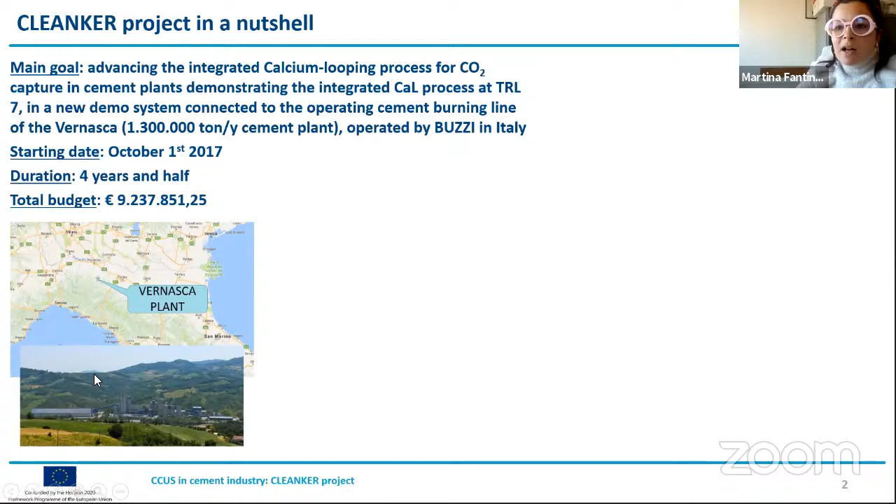So this is the Buzzi Unicem cement plant where our demonstrator has been erected in the last months. We are 13 partners, 5 from EU member states, plus Switzerland and China.

And the partners have complementary skills both on modeling and on experimental activities in order to reach the main goal that we have. You can also see that this is a capture project, but we have a lot of work packages also devoted to other activities.

Indeed, at least in 2017, this was the first time for a European project focused on capture that included the full CCUS value chain study. In particular, there is a work package totally devoted to this activity.

And the tasks include the techno-economic modeling of CO2 transport, storage, and utilization scenarios, the CCUS regulatory issues in order to understand the gaps in national regulation, the definition of Buzzi and Italcementi cement plants, these two cement users, because they are partners in Cleanker.

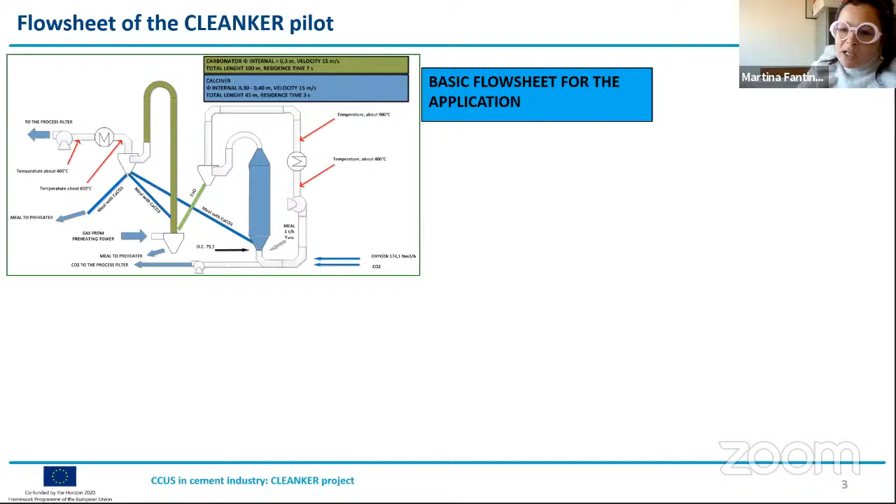I always like to start with this sketch because in 2017, Cleanker in our project proposal was just this drawing. And after the first year and a half, after the effort of the partners devoted to the engineering of the demo system, the flow sheet became a bit more complicated.

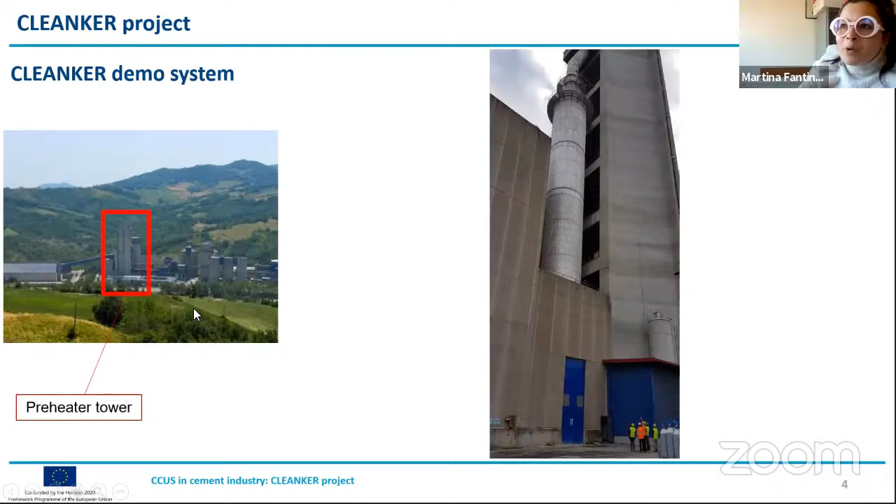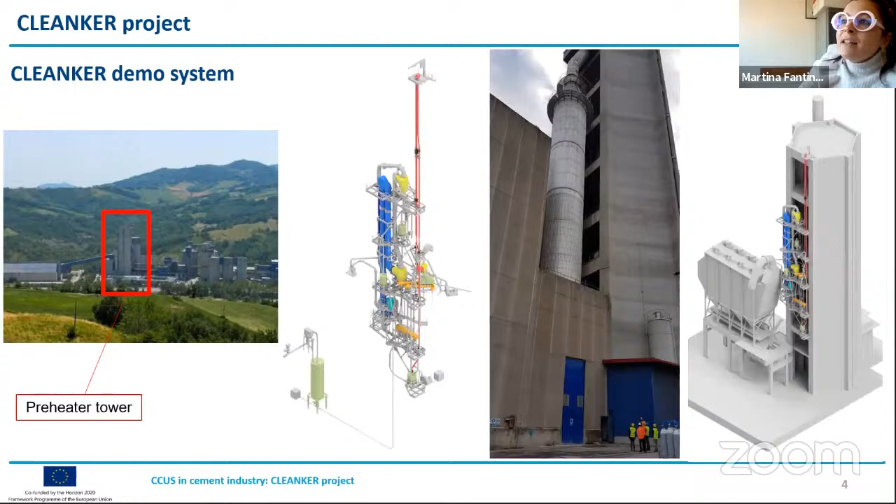After more than 3 years, we have done a lot of work in the characterization of the raw meal at lab scale, engineering, construction, modeling, etc. And we have completed the erection work last autumn. In particular, here you can see a view of the cement plant.

The calcium looping technology basically is the loop of calcium between two reactors named carbonator and calciner. Here in the picture on the right, you can see the view of the carbonator, and here on the left, you can see the calciner and the integration in the preheating tower.

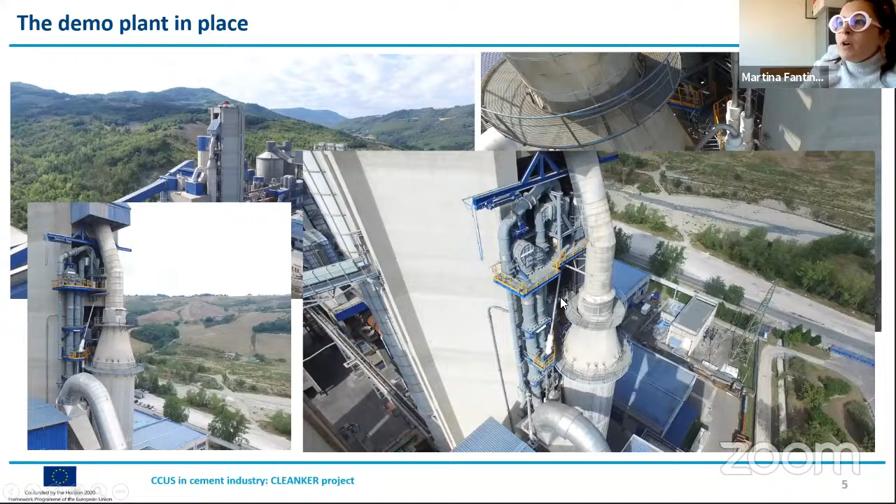In autumn 2020, we had also the opening event, which, of course with the restrictions due to the situation, included the cutting of the ribbon.

So the commissioning is completed, and from the point of view of testing, we are ready to start the experimental campaigns.

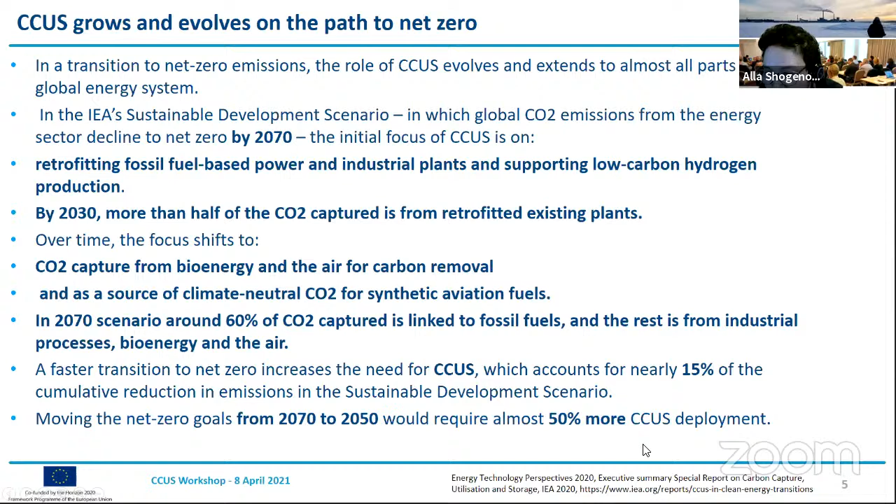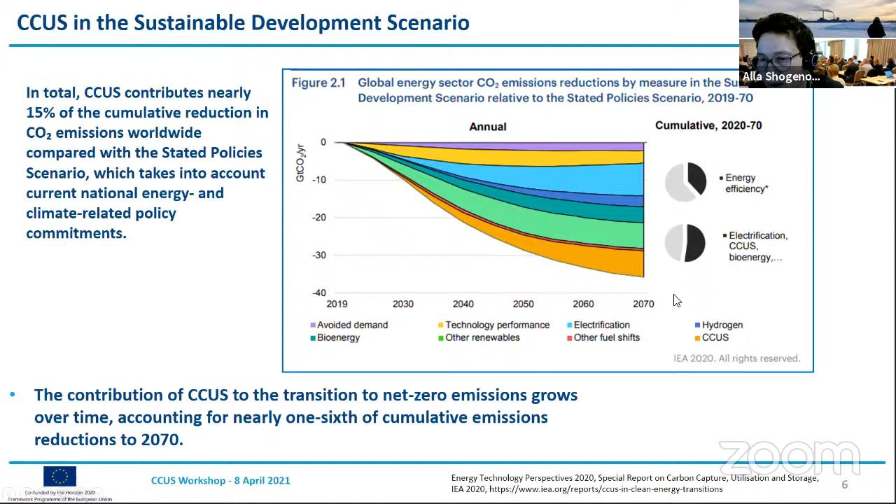Also, carbon removal plays an important role in net zero transitions. Technology-based carbon removal is needed to balance emissions that are technically difficult or expensive to eliminate.

When net zero emission is reached in SDS, still about 3 gigatons of emission remains, notably from transport and industry sectors. These emissions could be captured from bioenergy and the air and stored underground. Direct air capture technologies have significant potential to accelerate the transition to net zero, but we need to decrease costs. So capturing directly from the air and storing is an alternative to capturing it from bioenergy.

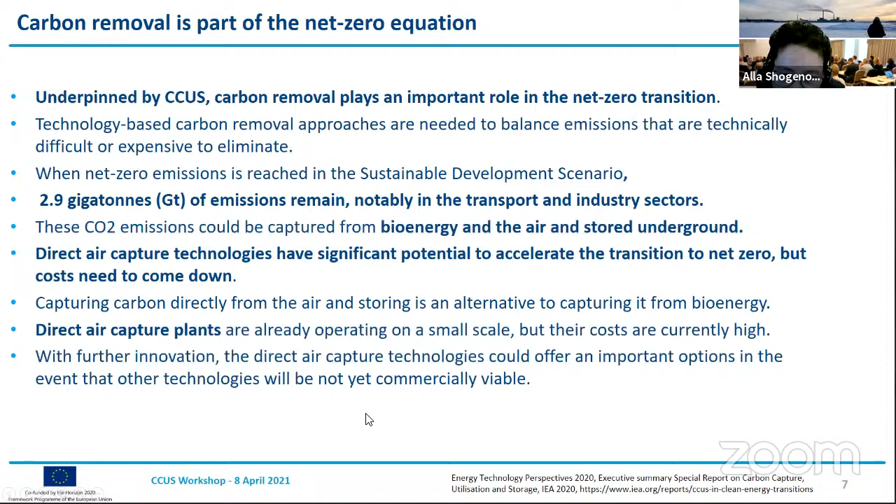Direct air capture plants are already operating in small scale, in pilot scale. Costs are currently high, but with further innovation, it will be a very important option, especially if other technologies are not yet commercially available.

So you can see how CO2 emissions will be captured with CCS in the sustainable development scenario. Now in 2020, total CO2 emissions in the world are more than 33 gigatons. In 2030, after applying CCS and all measures, we will still have 27 gigatons. In 2050, we will not come to zero—we will still have 9.4 gigatons. According to this scenario, net zero, carbon zero society will be possible only in 2070.

What is interesting is that in this scenario, only 10% of CO2 is possible to use in 2050 and 2070—all other CO2 we have to store.

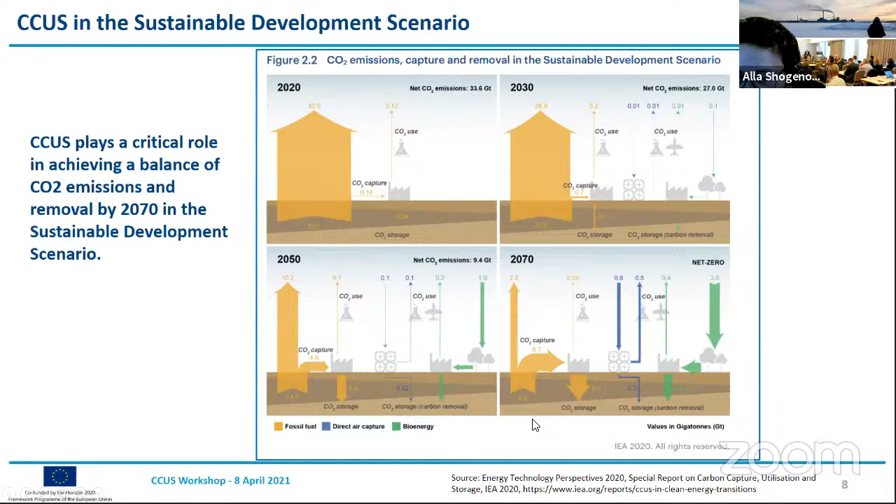Generally, around 60% of CO2 captured up to 2070 is from fossil fuel use. The rest is from industrial processes, bioenergy, and direct air capture. This reflects difficulties to eliminate CO2 emissions in some industry sectors and in the cement sector, and also the growing role of biofuels and direct air capture in producing synthetic aviation fuels and removing CO2 from the atmosphere. So fossil fuel is still the source of about half of CO2 captured in 2070, and around 1/3 of this is from low carbon hydrogen production from natural gas.

So when net zero emissions are reached in 2070 in the sustainable development scenario, 9.5 gigatons is captured and stored, and all the rest is captured and used.

The power sector accounts for around 40% of the captured CO2 in 2070, but half of this is linked to bioenergy, and 1/4 of CO2 captured is in heavy industries. Almost 30% is in fuel transformations to produce hydrogen and ammonia from fossil fuels. CO2 captured from biofuel plants is also used to make synthetic fuels or stored for carbon removal. The next 7% comes from direct air capture.

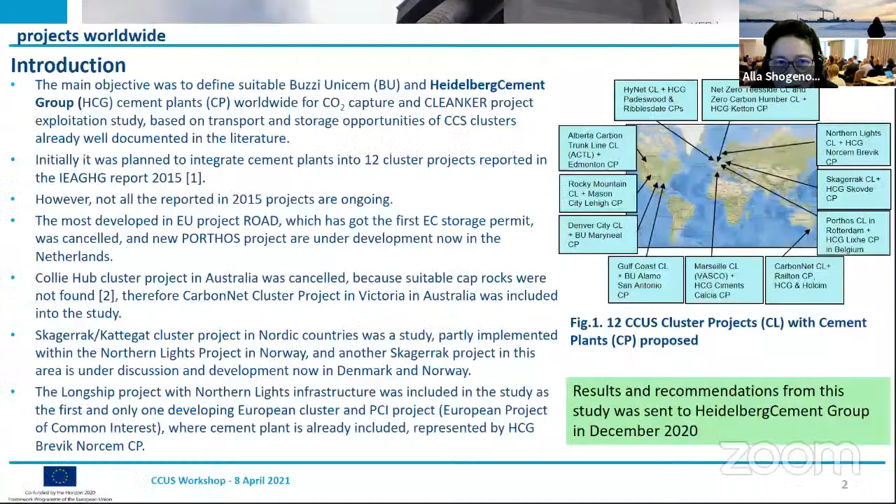Okay, thank you very much, I will try. So generally, this work was made in the Cleanker project as one of the work package 7 tasks. We had to define suitable Buzzi cement and Heidelberg cement plants worldwide for integration in the worldwide CCS cluster projects.

Initially, it was planned to integrate cement plants in 12 cluster projects reported in International Energy Agency Greenhouse Gas Report 2015. From that time, some projects were stopped, new projects started. So finally, we made integration of 12 cement plants into 12 worldwide projects.

Methodology of this work was that we collected data into the database from 12 projects: geological, technical, CO2 emission, transport data, and also we collected data from the Buzzi and Heidelberg cement group cement plants from these countries, and we needed to define the best suitable match.

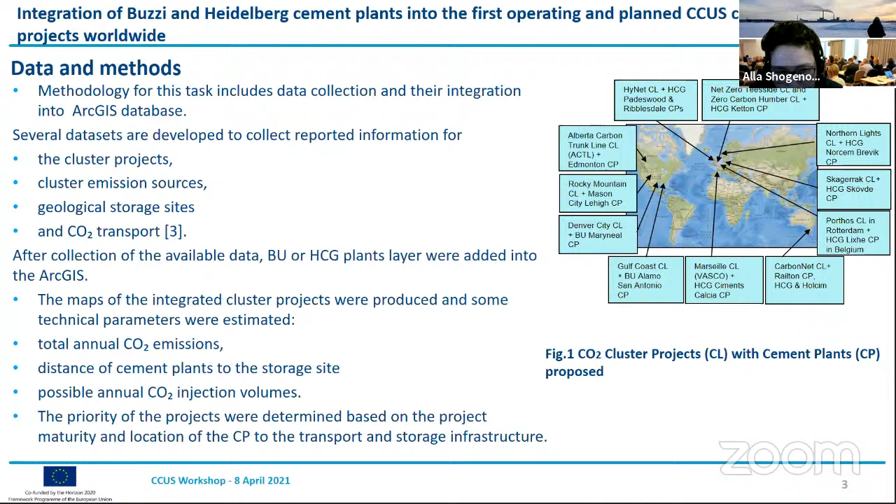I will start with some details for some projects. In North America, we mapped 4 projects, 1 in Canada and 3 in USA. In Canada, the Alberta Carbon Trunk Line project is very interesting because it used CO2 emissions from 2 emission sources, which could be transported along the available large diameter pipeline, 16 inches, with a distance of available CO2 pipelines of 240 kilometers, and the CO2 storage planned in Clive field, Alberta.

This project reported last year that all operations are ready, and storage is planned in the Leduc Formation Nisku Reservoir at a depth of about 2 kilometers. Generally, the annual capacity of the pipeline is about 15 million tons, and they will give access to all producers in the Alberta Industrial Heartland.

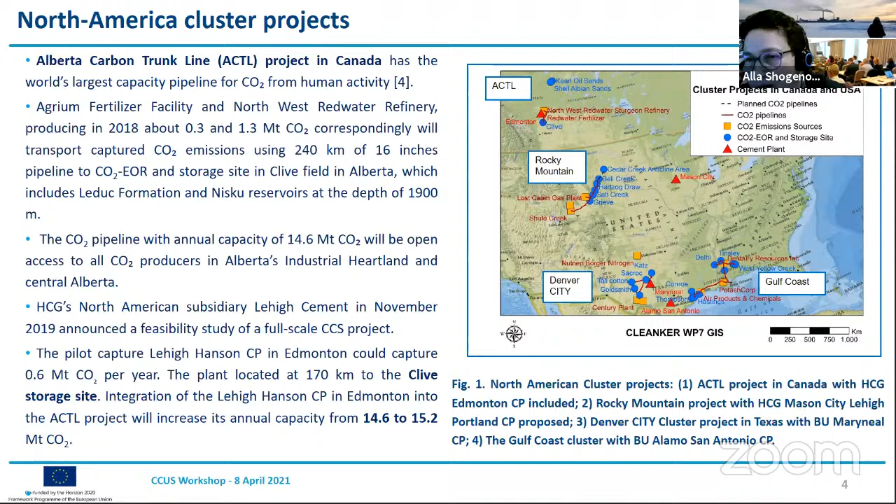There are very good plans for integration of one cement plant. Piloting is already started for the ACTL cluster in Canada.

And in United States, we mapped 3 projects: Rocky Mountain, Denver City project, and Gulf Coast project. We identified the cement plants close to these projects. All these cluster projects in the United States are using CO2 for enhanced oil recovery.

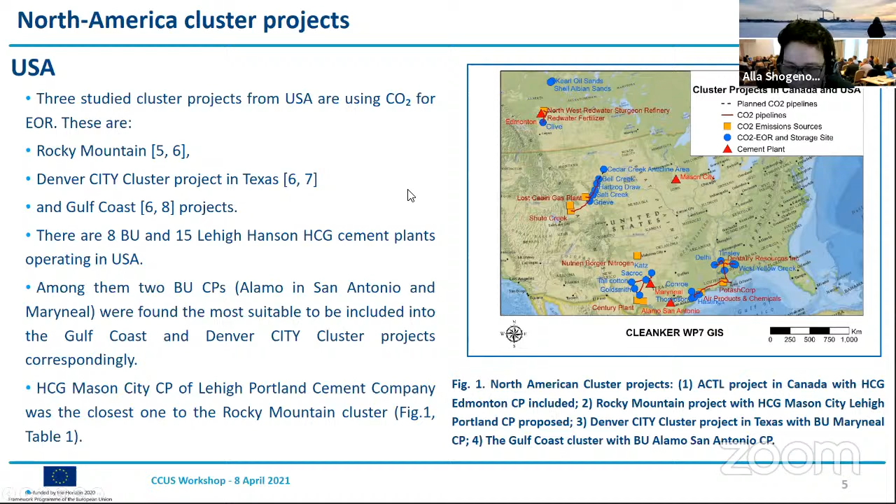I would like to show some more detailed maps. This is the Rocky Mountain cluster, and they have at least 6 operating CO2 enhanced oil recovery fields. They use annually more than 10 million tons of CO2 capture, 2 gas processing plants, and the Mason City Lehigh Hanson cement plant could be integrated, but the location is not very close, about 1,200 kilometers.

So in the Denver City cluster, a large project already uses 45 million tons of natural CO2, with more than 8 million tons captured by 3 plants. You can see these 1, 2, 3 plants. And there are at least 6 depleted oil fields which could be used.

All these projects I'm speaking about in the United States have been operating successfully for many years. For the Denver City cluster, the Maryneal cement plant is located at a good distance, only about 81 kilometers from the Sacroc oil field, and it could be integrated into this cluster.

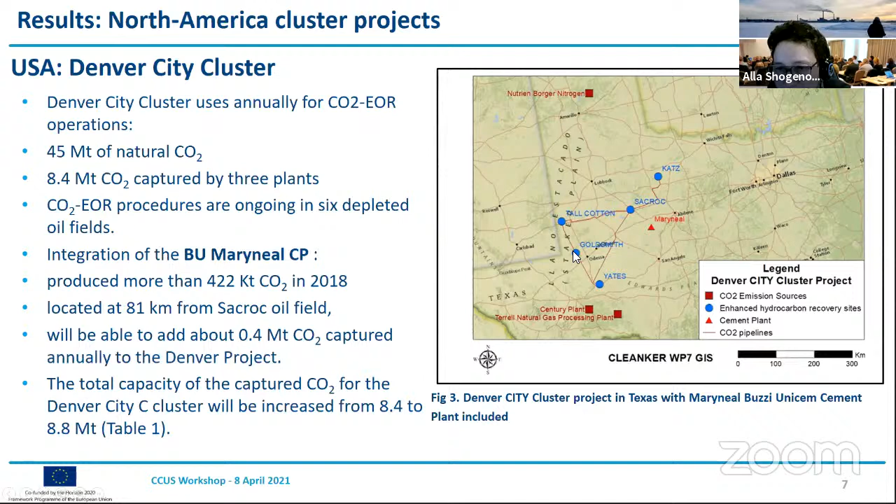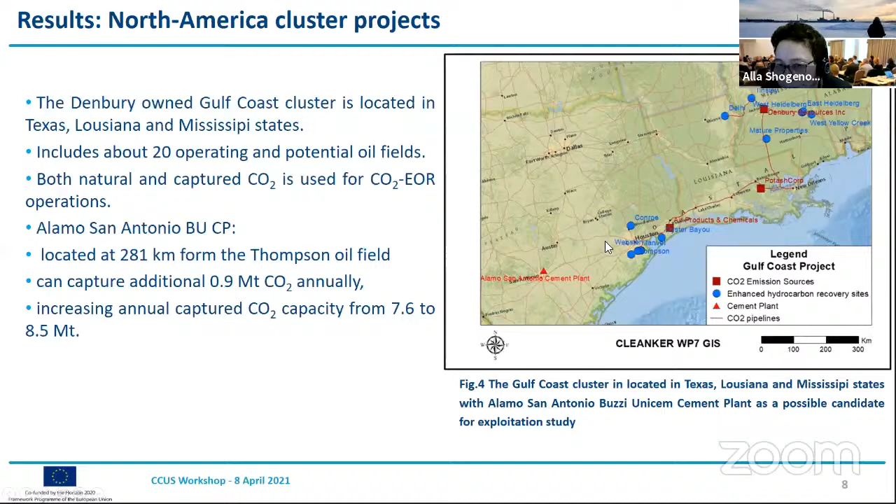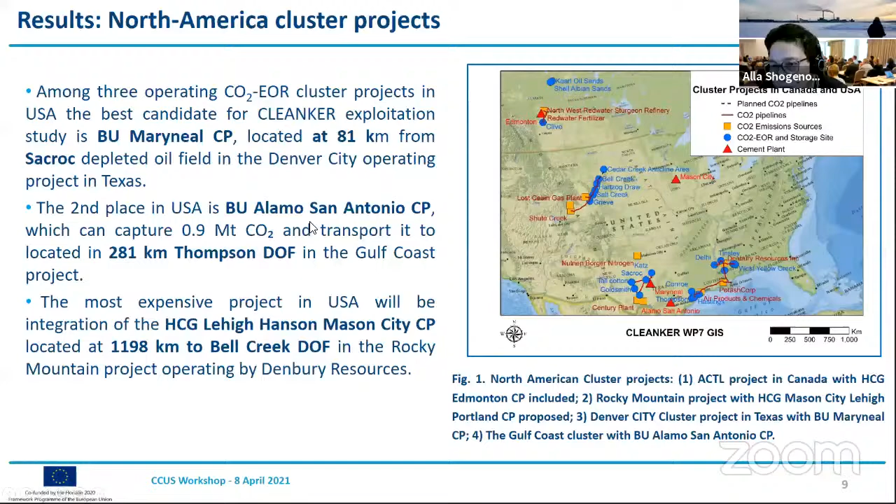The Denbury-owned Gulf Coast project is located in 3 United States states. There are 20 operating and potential oil fields, and the San Antonio cement plant is located at a distance of about 280 kilometers and could be integrated. So generally, the best for United States, we found 3 cement plants for 3 operating cluster projects using CO2 for enhanced oil recovery, and the best location is for the Buzzi Unicem Maryneal plant.

We also mapped one project in Australia. It is the CarbonNet project, which we mapped instead of the Collie project in Australia. The Collie project was cancelled because they did not find suitable cap rocks in the storage site.

But the CarbonNet project is in a good developing phase. They have the Pelican storage site, and they have already drilled an injection well there. This will be offshore storage, and this site, known as Pelican, has good capacity, at least 125 million tons.

They have already 3 injection wells and 1 observation well, and a cement plant is located close by. The closest is the Heidelberg, partly shared by Heidelberg Cement and Holcim Australia Railton plant, but it's located in Tasmania. The distance is about 350 kilometers by ship, plus also 20 kilometers onshore by pipeline.

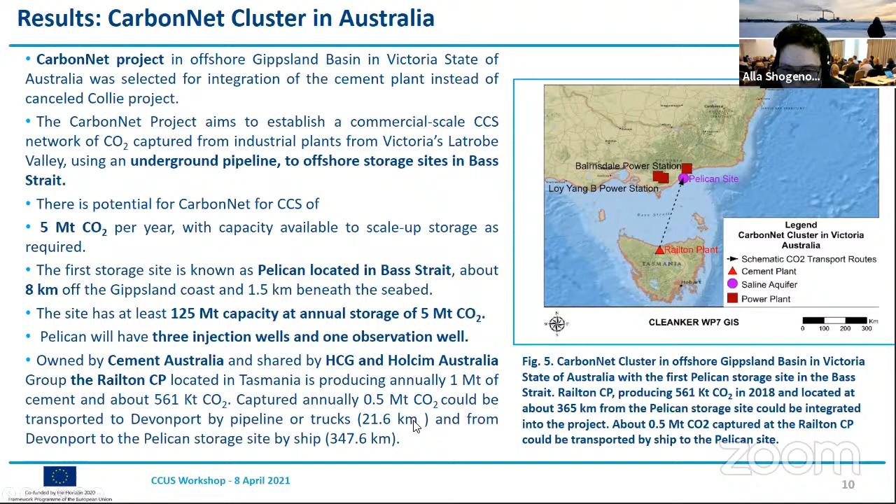If we go to the European project, most people interested in CCS know that the most advanced project in Europe is the Longship project with Northern Lights infrastructure in Norway. This is the only project in the world which already includes the Norcem Brevik cement plant.

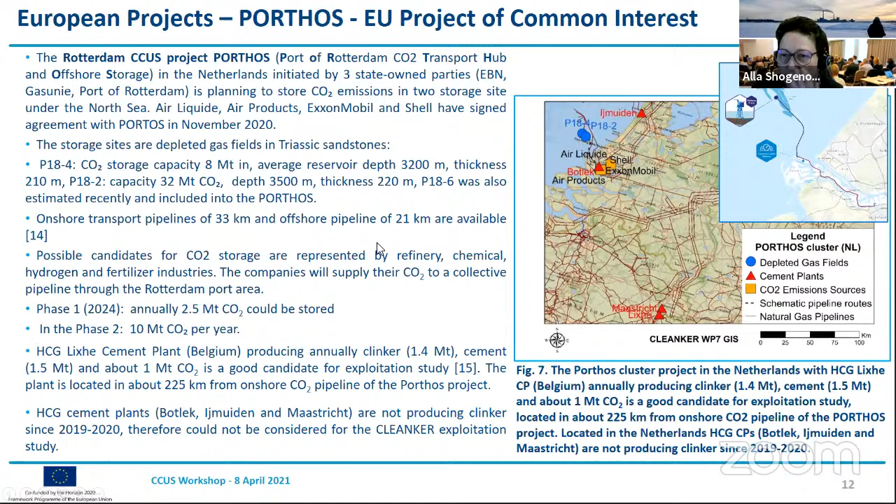We also mapped the Porthos project in the Netherlands, which replaced the Rotterdam project. Now there is no cement plant in the Netherlands which could be integrated, because the 3 available cement plants there are not producing clinker anymore, so the CLEANKER technology could not be applied. But the cement plant Lixhe in Belgium is located very close, only 225 kilometers from the onshore CO2 pipeline of the Porthos project. The Porthos project is planning to make storage in offshore depleted gas fields.

A very interesting country for cluster projects is the United Kingdom. We mapped 3 projects: Net Zero Teesside, Zero Carbon Humber, and HyNet. Net Zero Teesside and Zero Carbon Humber are planning to make storage together in the Endurance offshore saline aquifer storage site. We identified the Heidelberg Cement Ketton cement plant, which could be integrated, with CO2 transported from this plant to the Endurance site.

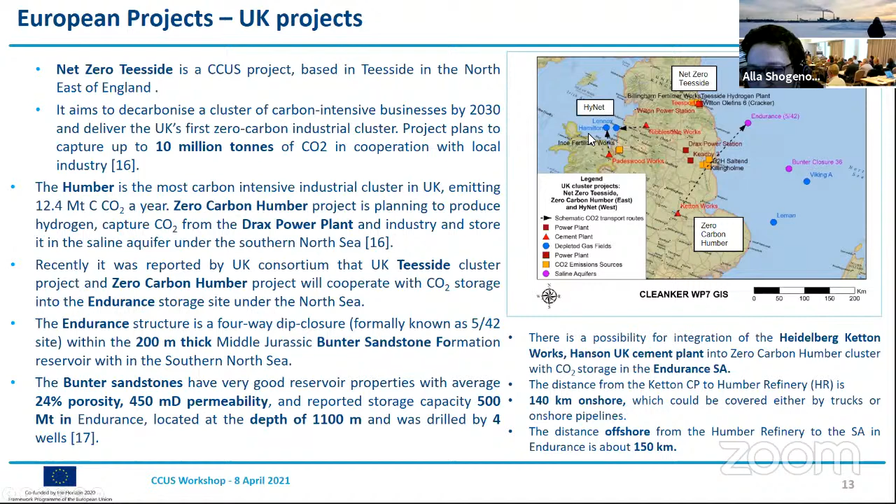But the most exciting proposal was to integrate with the HyNet project, which is planning to produce hydrogen. We proposed integrating 2 cement plants, Padeswood and Ribblesdale, which are located very close, 50 kilometers and 85 kilometers respectively.

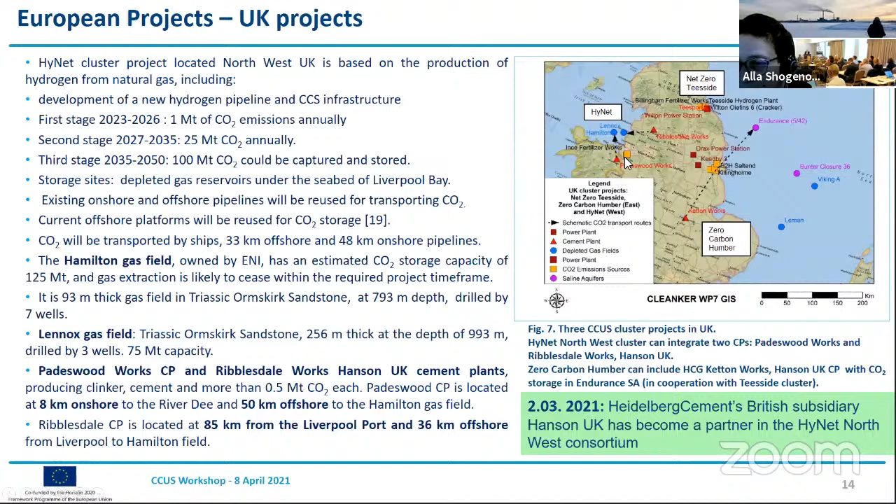We are very glad that we sent our recommendations from this project to Heidelberg Cement group, and they took the decision and already signed an agreement with the HyNet project that the Padeswood cement plant will be integrated and will work together in the HyNet project.

The information from Heidelberg Cement came in the beginning of March that they will make a feasibility study, and the Padeswood cement plant will be the second cement plant in Europe integrated in a CCUS cluster project after Northern Lights, of course.

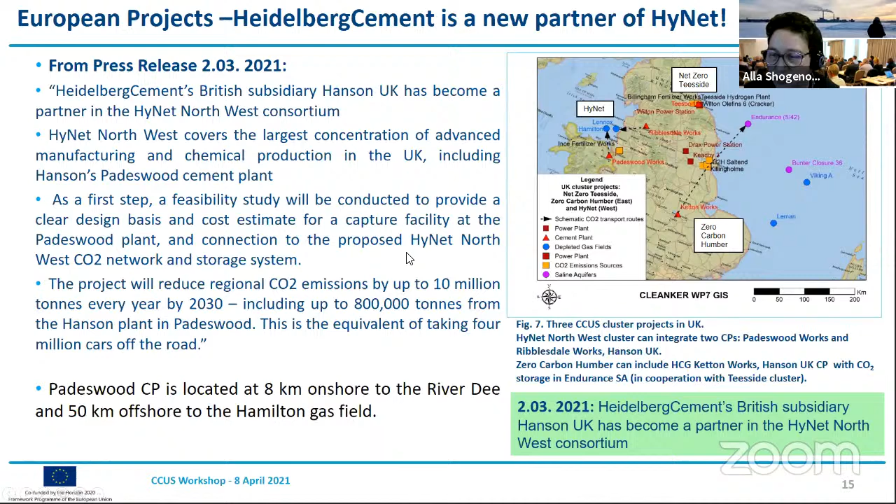In conclusion, we mapped technical and geological parameters of 12 large projects, which were included into the database and integrated with 12 Heidelberg Cement and Buzzi Unicem cement plants prospective for CLEANKER calcium looping technology exploitation. The distance from cement plants and maturity of the project permitted us to propose priorities for possible integration.

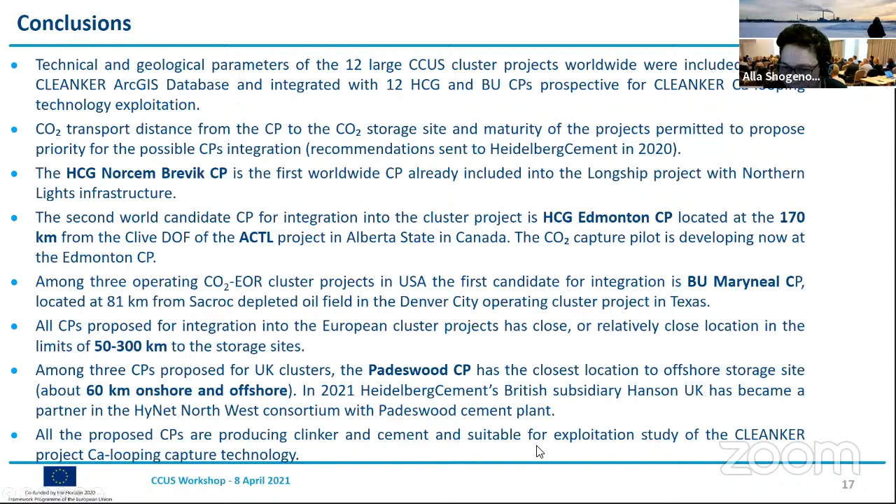We found the most suitable projects in the United States and in Europe. They are located 50 to 300 kilometers from the storage site. The Padeswood cement plant, which has the closest location in the UK clusters in HyNet, has already joined the consortium of the HyNet Northwest cluster project. All the cement plants which we proposed are producing clinker and cement and are suitable for the exploitation study of the CLEANKER project. Thank you very much.

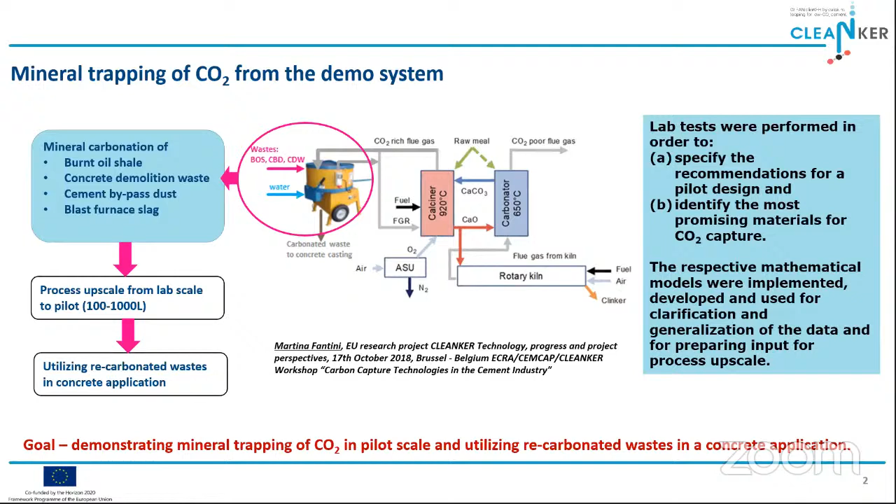As for the waste used, several types of waste were collected from different industrial sectors and characterized for their CO2 binding ability. These include burnt oil shale samples, concrete demolition wastes, cement bypass dust, as well as blast furnace slag from the steel industry.

Burnt oil shale samples were quite promising, but unfortunately the concrete demolition waste samples were not, which I will go into detail later. Here you can see the free lime content, which is the main contributor for mineralization, is non-existent in concrete demolition waste, unlike in the burnt oil shale samples.

So therefore, we also added other samples such as cement bypass dust and blast furnace slag to see the potential. Here you can see the phase composition of the different samples used in the laboratory tests, their CO2 theoretical maximum values, and already existing mineral CO2 inside these samples.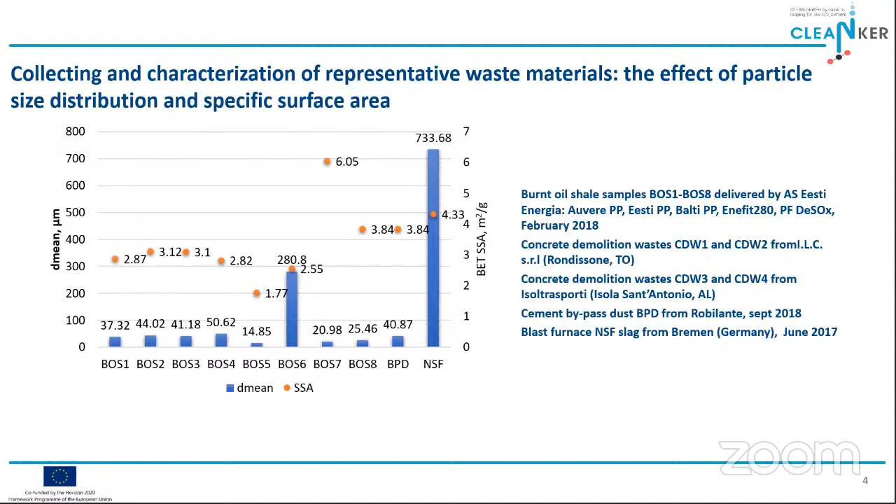As for the scale of the laboratory experiments, they were conducted firstly in a 1 liter intensive mixer using a low water to solid ratio of 0.2. Later, for process upscaling, a 46 liter concrete mixer equipped with gas inlets and outlets was utilized. Operation conditions such as CO2 content in the gas phase, rotational speed, and material flow were varied during the experiments in order to see the parameters' effect on the process.

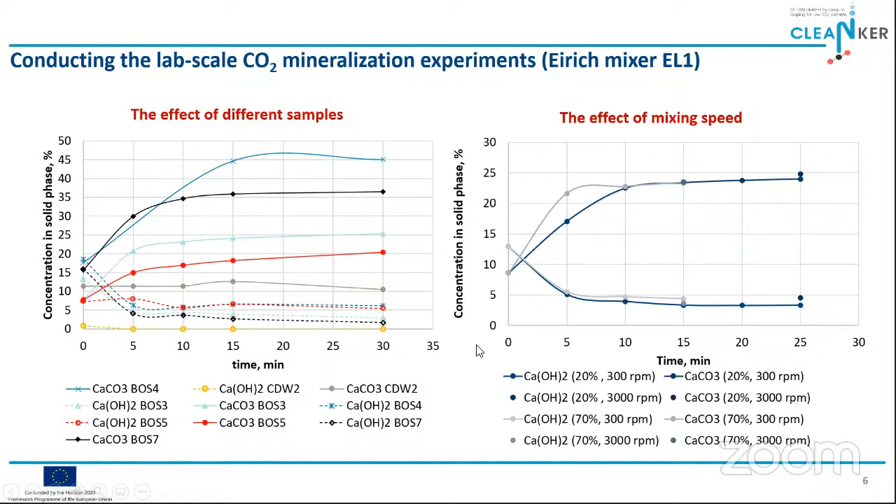The effect of mixing speed as well as concentration were not as visible, meaning they did not really affect the process.

As for changing parameters such as flow rates of both gas concentration and the mass of the samples, they can accelerate the CO2 mineralization process due to improved contact of the phases, up to a point. As you can see here, while the mass increased, the reactor efficiency and carbonation degree increased up to a point, as well as when the gas flow increased.

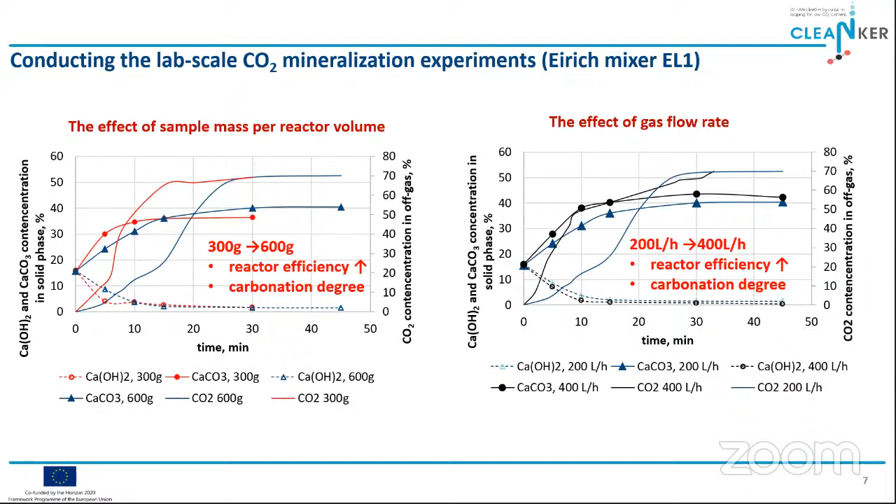These results are again from the first phase using the 1 liter intensive mixer. For the experiments in a modified concrete mixer, results were comparable with the 1 liter intensive mixer, which shows that upscaling with this type of apparatus is suitable.

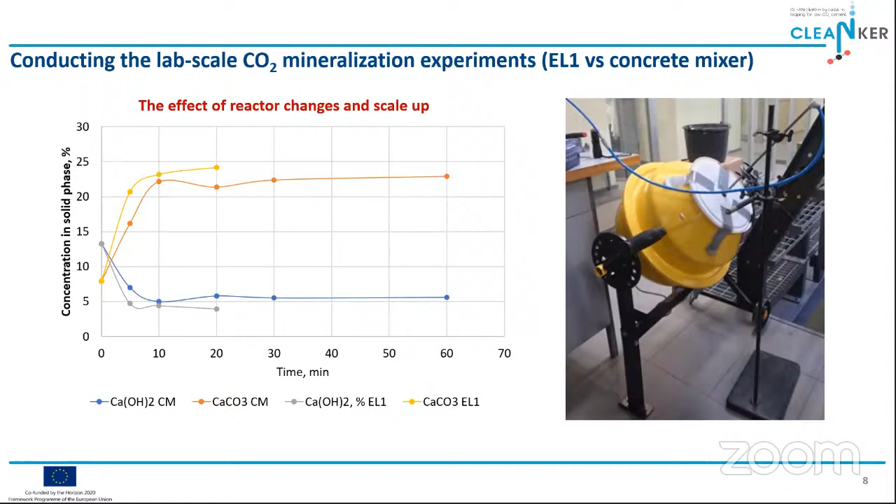The preliminary tests done in Italy were put into practice. A CO2 gas stream was artificially prepared by mixing CO2 and air in different concentrations, allowing variation of CO2 concentrations. The 200 liter pilot was designed based on a commercially available concrete mixer.

It was integrated into the calcium looping demo system, and equipped with inlets and outlets, as well as CO2, temperature and moisture sensors to detect the reaction progress.

Solid samples were collected after every 10 and 30 minutes and submitted to thermogravimetric analysis for quantification of calcium carbonate as well as portlandite. The graphs on the right show that the results indicate the system saturated after 2 hours, as portlandite became depleted and the calcium carbonate stabilized.

From here, it can be said that preliminary testing confirmed that CO2 can be mineralized from a gas mixture by burnt oil shale in the proposed wet conditions.

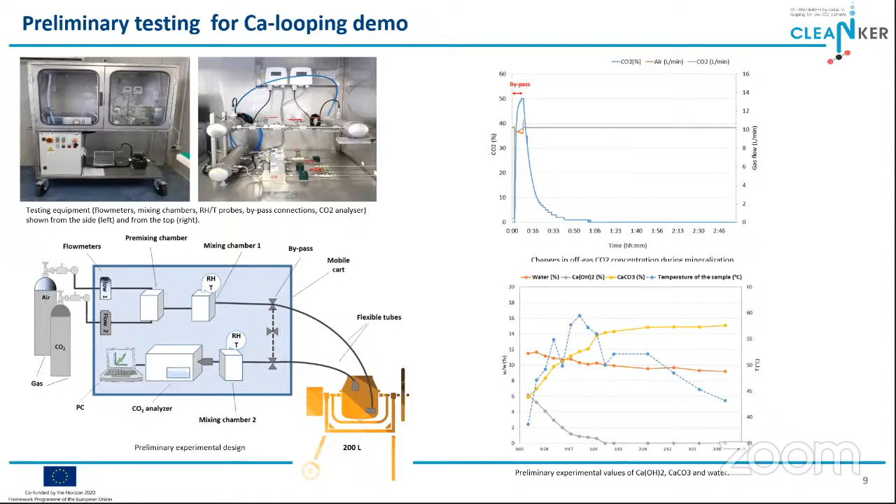To summarize what we have, the results show that the binding capacities can go up to 0.18 kilogram for oil shale ash and 0.14 kilogram for cement bypass dust.

The CO2 sequestration tests in the larger 200 liter concrete mixer done in Italy confirm the applicability of wet carbonation at larger scale.

The laboratory tests show that free lime content can be exhausted within 30 minutes in a high CO2 concentration.

Overall, environmental problems such as sulfate leaching are not seen, since we use a low liquid to solid ratio. Calcium sulfate and other sulfides are not detected in the tested samples and products.

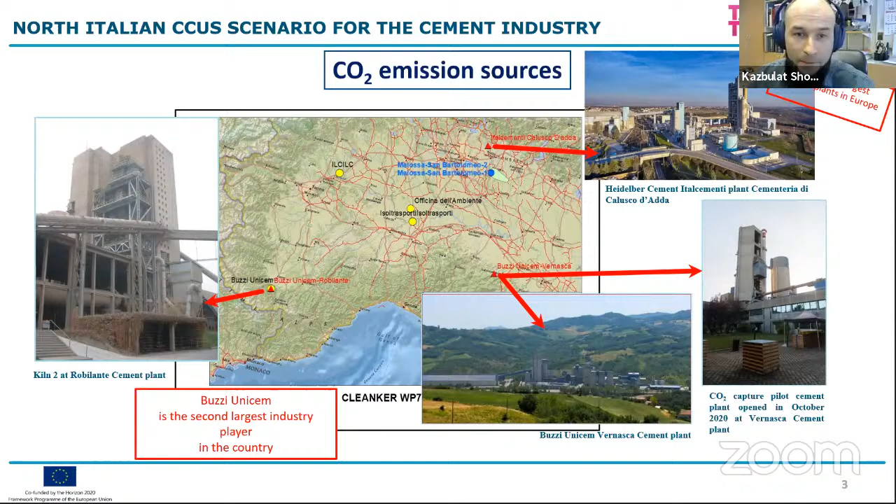You can also see the location of the studied structure, Malossa San Bartolomeo. Northern Italy has good options for CO2 geological storage, including the Lombardy region.

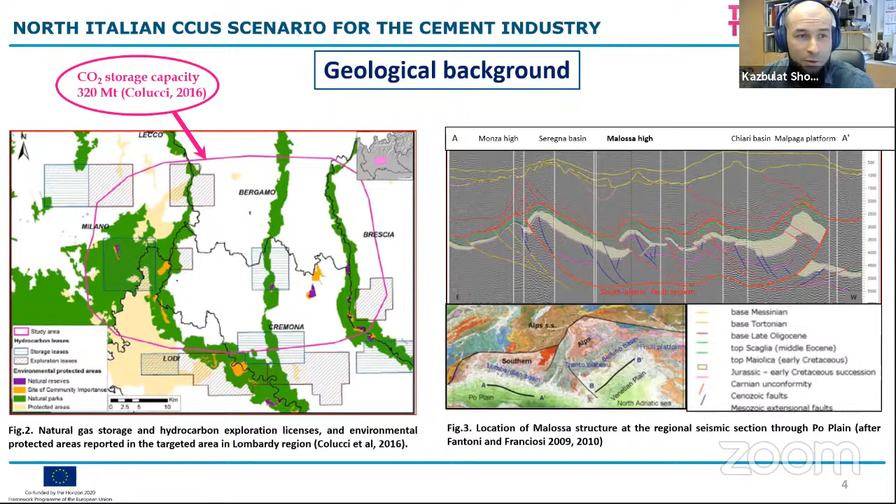CO2 storage is not permitted in Italy in seismic high risk areas. Here you can see the location of the Malossa structure, located between two high risk seismic areas, but the Malossa structure itself is in a low risk area, located in the central part of the Po Valley, in the Lombardy region of northern Italy.

Here you can see some geological background. We have a good cap rock with average thickness of 500 meters, and according to data from 18 wells, the average thickness is 400 meters.

So the formation is the Santerno clay formation, composed of clays with quartzitic sand interlayers, with average porosity of 6% and permeability of 0.1 millidarcy.

The reservoir is the Messinian Sergnano gravel conglomerate formation, average depth 1,200 meters and thickness of 200 meters, and according to the data from the 18 wells studied, the average thickness is 83 meters.

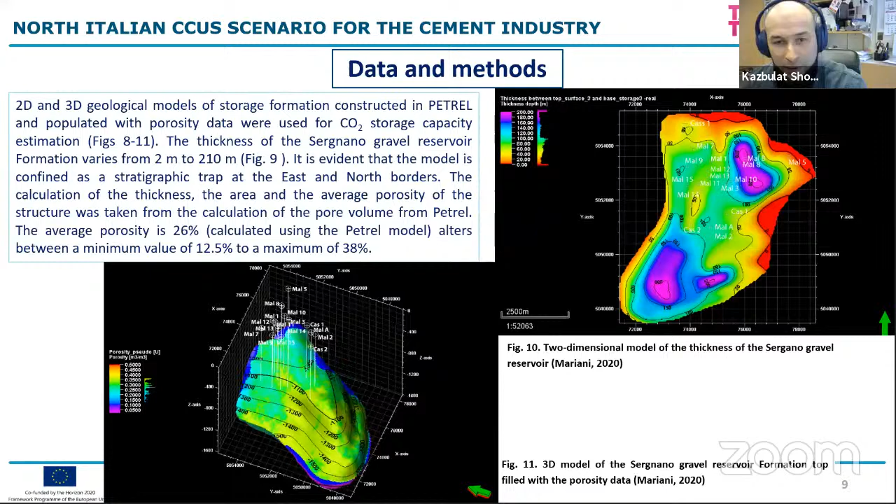The average porosity estimated by Petrel was 26%, with a range of 12.5 to 38%. Here you can see the updated table of parameters after 3D modeling in Petrel.

CO2 storage capacity was estimated with different levels of reliability, called the optimistic and conservative approach. For the optimistic approach, we used the approach described by Bachu et al. 2007.

For the conservative approach, we used a simulation based on Monte Carlo, presented by the US Department of Energy. Here you can see the formula.

For the optimistic approach, we took a storage efficiency factor of 10 because our structure is bounded by faults on two sides. According to our estimations of the net to gross ratio, we decided to choose a low quality reservoir parameter of 10.

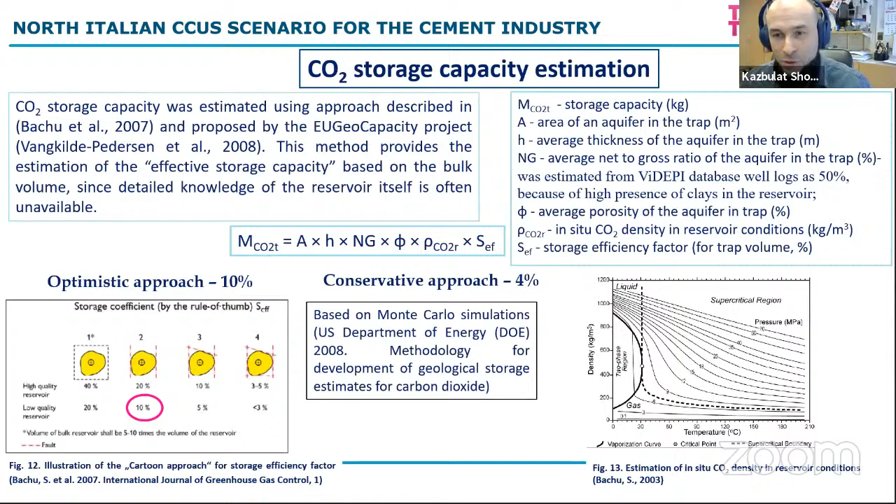For the conservative approach, we chose 4% for the storage coefficient. Here you can also see the estimation of in situ CO2 density in the reservoir conditions.

Here is the result of our estimation. The average CO2 storage capacity in the optimistic approach is 24.79 million tons of CO2, and for the conservative approach it's 9.9 million tons.

Considering the limited storage capacity in the Sergnano gravel reservoir formation, even with the optimistic approach of capacity calculation, it was necessary to determine the most suitable and economic case for the CCS scenario, which includes the Vernasca cement plant.

For calculation of CO2 emissions which could be captured, the data recently reported in the European Emission Trading System for 2020 were taken for economic modeling.

It was estimated that the capacity of the Malossa structure in the Sergnano gravel reservoir for a 3 plant scenario will be enough for only 13 years, while for a 2 plant scenario, Vernasca and Calusco D'adda, it would last for about 21.6 years.

A 1 plant scenario will be enough for the whole project duration of more than 30 years for all 3 plants, but it will be the most expensive because it will not be possible to share exploration, transport, storage, and monitoring costs. Here you can see the table with the estimation results.

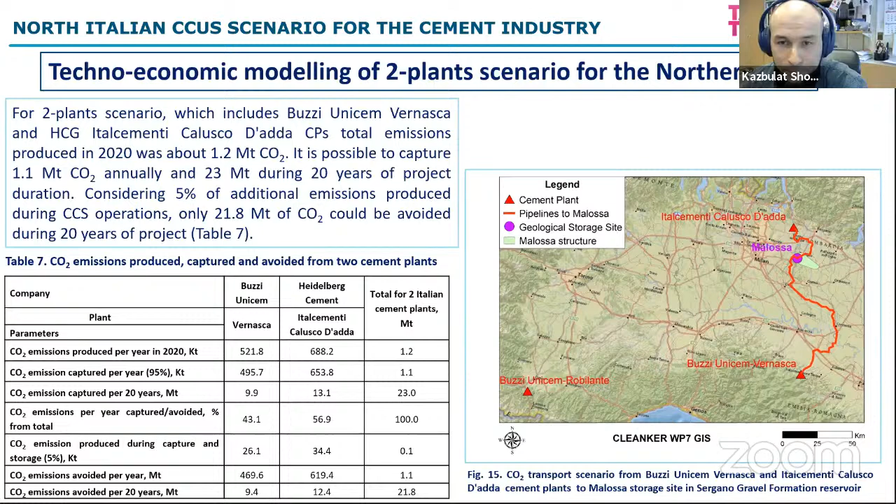The annual flow rate for the pipelines from the Vernasca and Calusco cement plants is less than 1 million tons per year, and distance to storage sites is 125 and 34 kilometers respectively. Therefore, 220 and 180 millimeter diameter pipelines will be sufficient.

As we're considering CO2 emissions produced and energy costs in 2020, we can expect cost reduction of 2% per year for 5 years. Not focusing on details, here you can see the cost estimations for monitoring, and the annual cost in millions of euros for each plant.

The total transport, storage, and monitoring cost for Vernasca cement plant is 15.1 euro per ton CO2 avoided, and for Italcementi Calusco cement plant it is only 3.95 euro per ton CO2 injected.

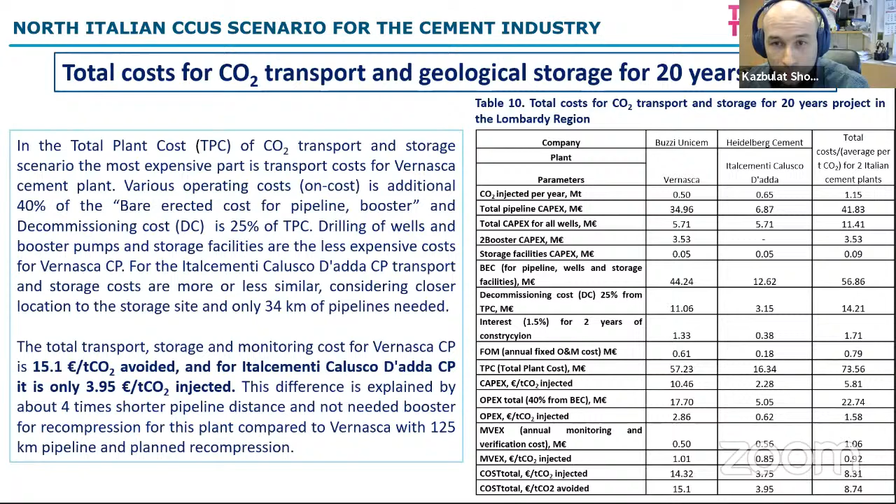Let's see the conclusions. The total CO2 storage capacity of the Malossa structure based on the conservative approach, considering the average porosity, is 9.9 million tons, while the total CO2 storage capacity based on the optimistic approach is 24.8 million tons.

The most economic and preferable two-plant scenario was selected for techno-economic modeling: Buzzi Unicem Vernasca and Heidelberg Cement Italcementi Calusco, with 159 kilometers of pipelines and total 1.2 million tons of emissions produced in 2020. It is possible to capture, transport, and store 1.1 million tons of CO2 annually.

And 23 million tons during 20 years of the project into the Malossa structure, considering limited CO2 storage capacity of the Sergnano gravel reservoir formation, with estimated average optimistic capacity of 24 million tons of CO2.

It was estimated that the capacity of Malossa structure in the Sergnano gravel reservoir for the 3-plant scenario will be enough for about 13 years, while for the 2-plant scenario about 21.6 years, and the 1-plant scenario will be enough for the whole project duration, more than 30 years. Considering 5% of additional emissions produced during CCS operations, only 21.8 million tons of CO2 could be

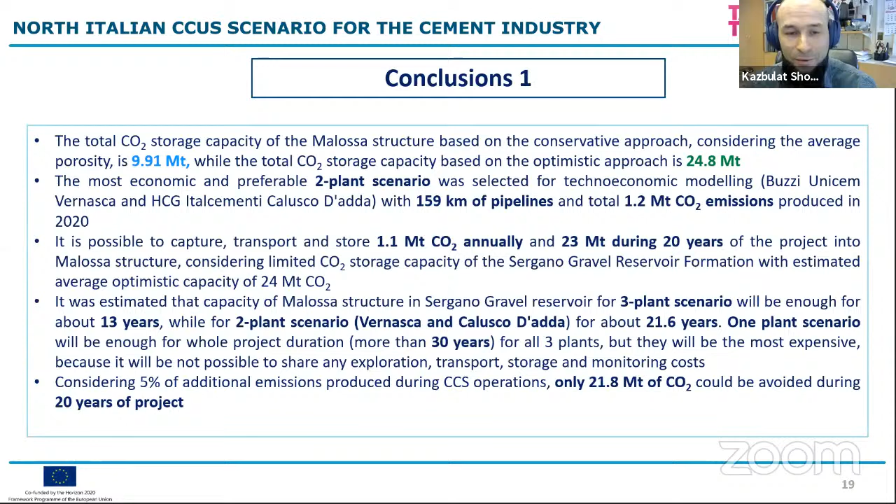CO2 transport, storage, and monitoring costs for this scenario is the most economic for Italcementi Calusco cement plant, estimated as 4 euro per ton CO2 avoided, explained by close location to the Malossa storage site.

About 34 kilometers of pipelines along available natural gas pipeline will be constructed. CO2 transport, storage, and monitoring cost is 15.1 euro per ton of CO2, about 4 times more expensive for the Vernasca cement plant, explained by 4 times longer pipeline distance and needed CO2 recompression.

For a more economic scenario for the Vernasca cement plant, it is highly recommended to use the depleted gas field, in the conglomerate, of the Corte Maggiore field in Piacenza, located only 30 kilometers from the Vernasca cement plant, and with good options for CO2 use for enhanced oil recovery.

The total cost for the CCS scenario will depend on the final cost of calcium looping CO2 capture at Vernasca at the end of the Cleanker project. At present, the cost of the reference calcium looping capture is 58 euro per ton of CO2 avoided, but could be cheaper for the Cleanker pilot at Vernasca.

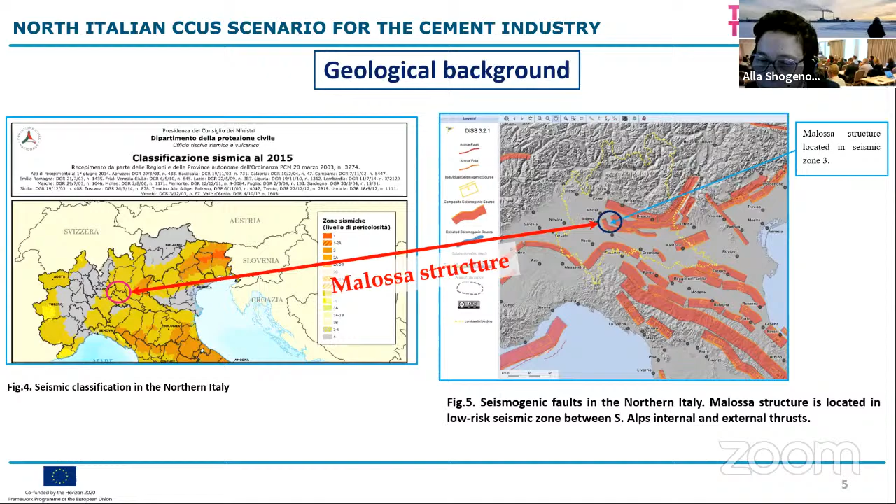I will answer this question. This depends on distance and CO2 flow. And also on the diameter of the pipeline.

Of course, so the question is that if we make a smaller diameter for this specific small amount, and we have a large distance, so for this, more than 100 kilometers, we need recompression.

Generally there are estimated graphs, it is not a stable or constant number. It could be estimated by available graphs and tables, and this is dependent on CO2 flow and distance. So you see, we have 125 kilometers, but the diameter...

Our diameter is not overestimated, it is just for this CO2 amount, because for example in Canada they built from the beginning an overestimated diameter of pipeline in order to include more CO2 emissions. And if you have a larger diameter, then it's better.

So generally this recompression depends on CO2 volume and distance, so the more distance, the more probable that you will need recompression. But is there a typical range of velocity of the liquid CO2 in the pipeline, typically? I don't know, because I guess this is what determines the need for recompression.

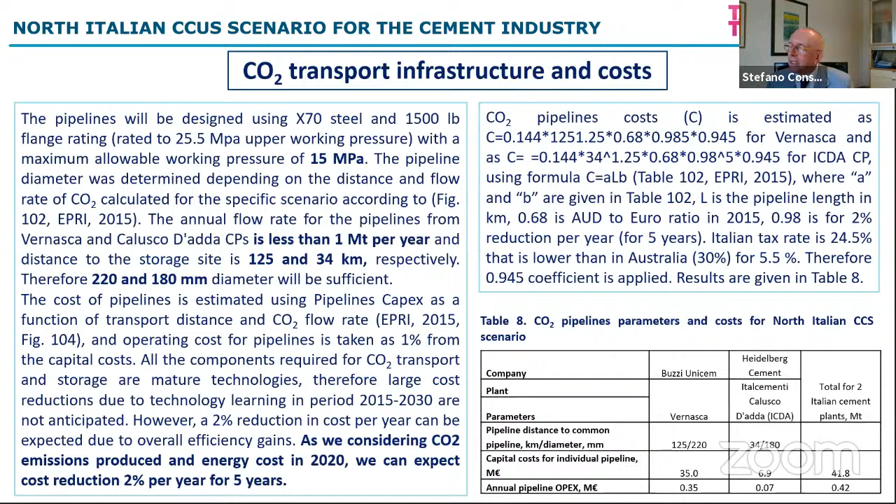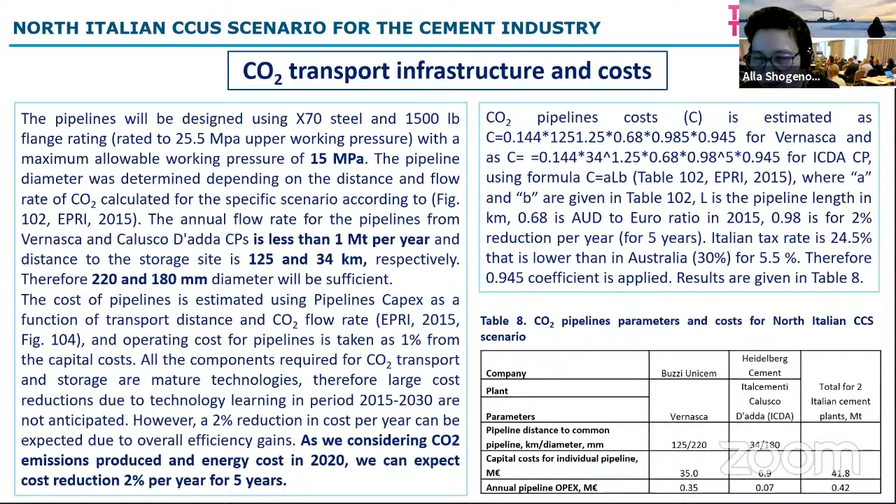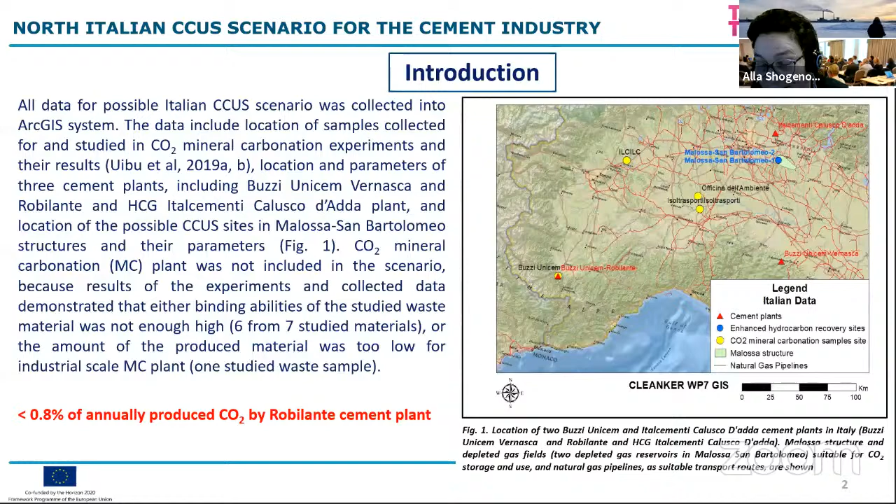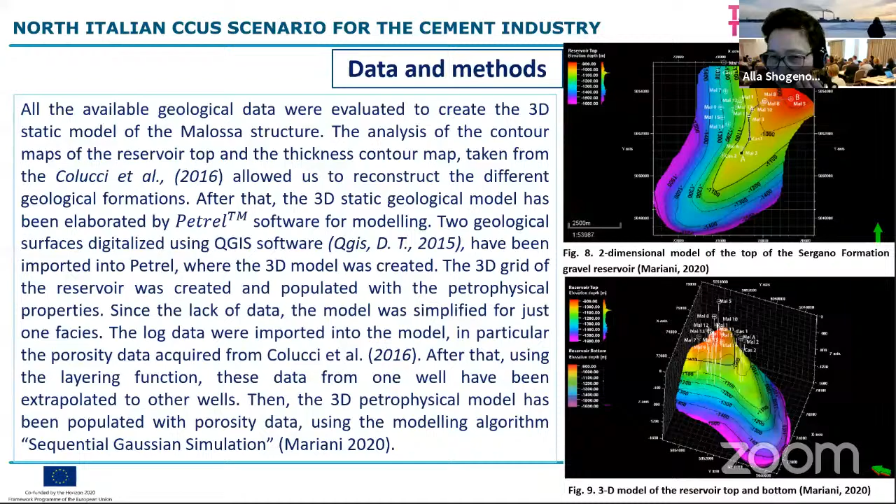What were the criteria? Yes, generally we especially developed a methodology for all this estimation for the Cleanker project. The methodology is based on a report from the electric industry, which included CCS from Australia, 2015, where they collected a lot of data and prepared a lot of blocks and graphs. So we used the approach from this Australian report, because Australia is a country with a lot of pilot experience in CCS. So we used recommendations, graphs, blocks, formulas, mainly from this Australian report 2015.

Okay, which is mentioned in your presentation? Yes, yes. Okay, yes, thank you. Thank you Kazbulat again, let's move to the next presentation.

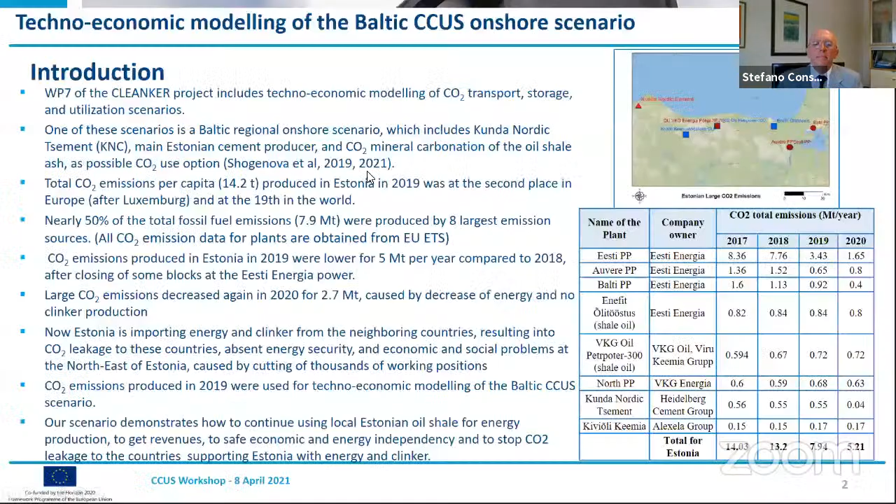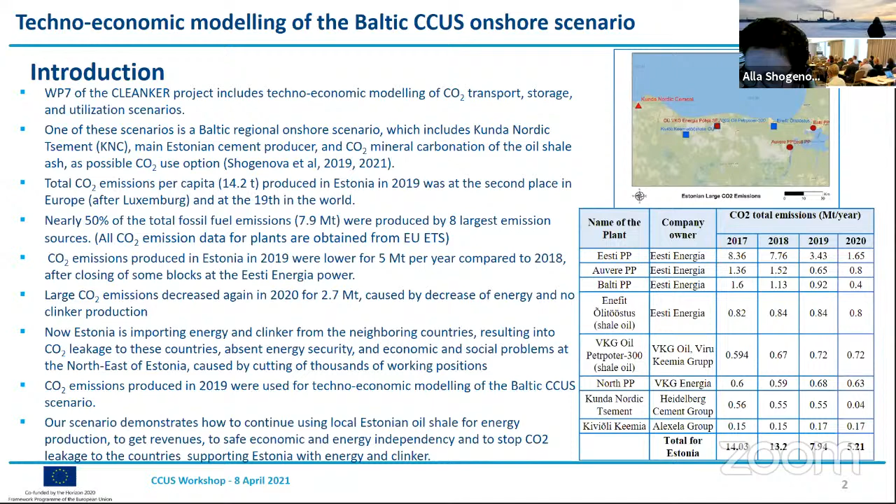Generally, the story is that in Estonia we have 8 large emission sources, which made Estonian emissions, but during last years these emissions are decreasing, because until 2019 Estonia was a large country exporting energy, but now we have a shortage of energy and we are importing energy. So our national Energia company decided that the way to stop emissions is to stop energy production from Estonian oil shales. But because Estonia still needs energy and we buy energy from other countries, we produce a leakage of CO2 to other countries, because the energy which we buy from our neighbors is produced with CO2, of course.

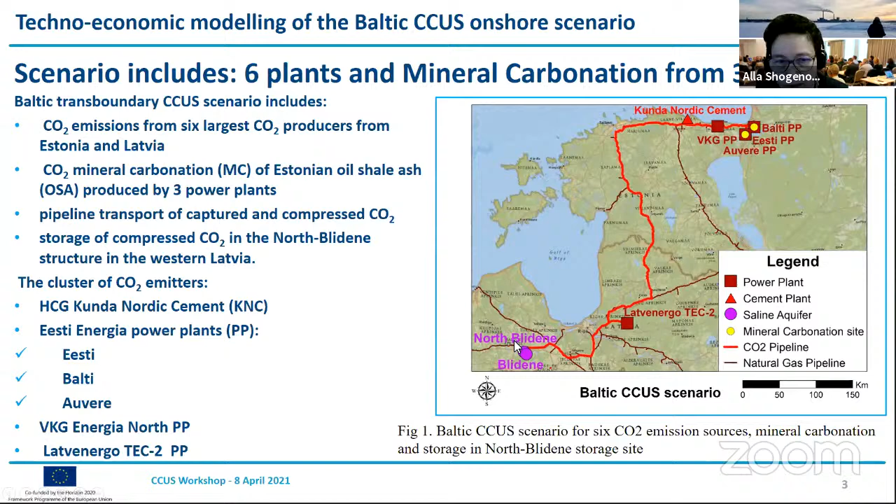So we propose a scenario for our 6 largest CO2 producers from Estonia and Latvia, with CO2 mineral carbonation of Estonian oil shale ash produced by 3 Estonian plants, with pipeline transport of captured and compressed CO2 to the North-Blidene structure in Western Latvia. And for...

techno-economic modeling, there is data and methods. We collected data in ArcGIS. We used building blocks datasets - the same question which was just asked of me - the same methodology for the Baltic scenario and the Italian scenario. So building blocks to estimate parameters and costs for transport and storage from this April 2015 Australian report from the energy industry.

We calculated all costs proportionally to CO2 flow of the plants. We applied a number of different parameters and estimated some costs which were estimated earlier. For CO2 capture and compression, we used numbers taken from our modeling in 2011.

We also used proposed numbers for emission allowance price, 40 euro per ton, and the cost for direct mineral carbonation by oil shale ash. We also got a ready number calculated by other authors for other ashes under similar conditions. There were formulas applied, and importantly, when we estimated total cost for 1 ton of CO2 injected, emitted or avoided, we used capital cost, operation cost, monitoring cost, and energy costs.

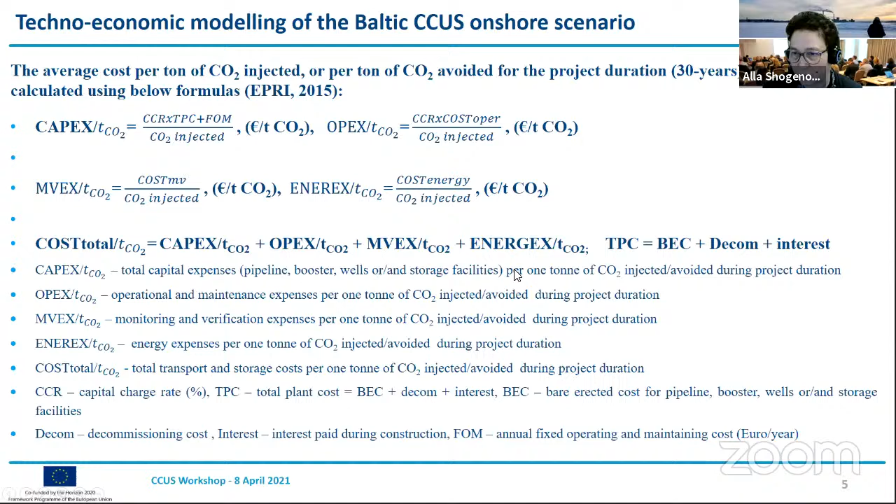Our reservoir is the Cambrian Series 3 Deimena Formation sandstones, and this Dimena Formation is covered by cap rocks - Ordovician Zebre Formation, Lower Ordovician, which are clay carbonate rocks.

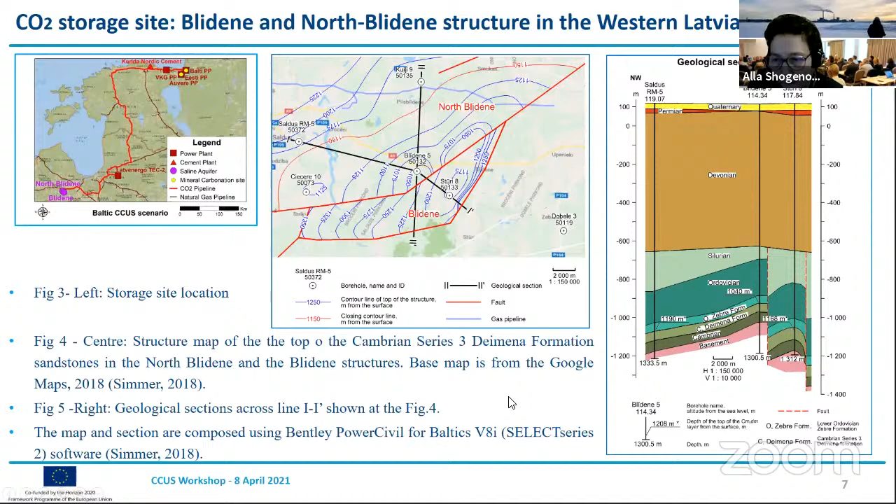There are 2-dimensional and 3-dimensional models constructed for these Blidene and North Blidene structures located in Western Latvia. Here are parameters of the Cambrian Deimena reservoir and another geological section of the structure.

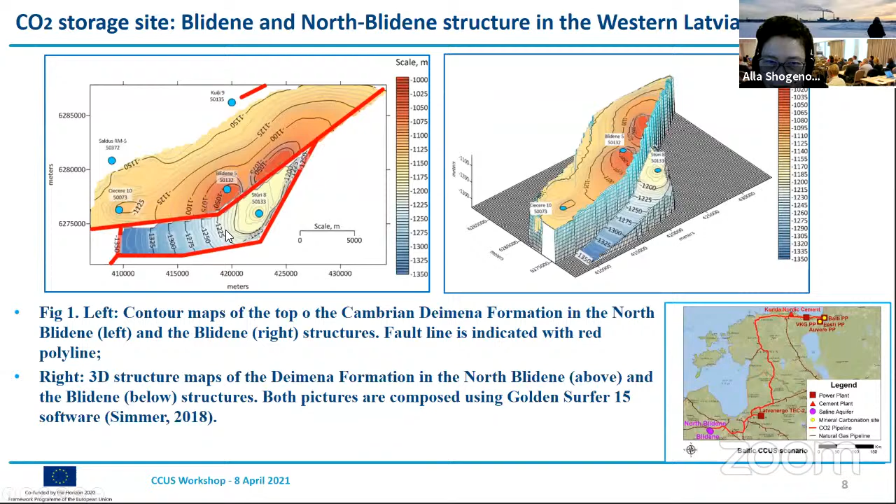As you can see, the structure has 2 parts. North Blidene is a larger area and it is open from one side, but the smaller part, Blidene, which is located lower, is deeper. It is closed from all sides by faults and borders - it's a lower area, closed, with smaller capacity.

We can see all the parameters. The depth in North Blidene is more than a kilometer, the thickness about 50 meters, so the net to gross rate is very good. The temperature in our Baltic structures in Latvia is rather low at such depths, about 20 degrees Celsius, but for CO2 storage that's a good parameter.

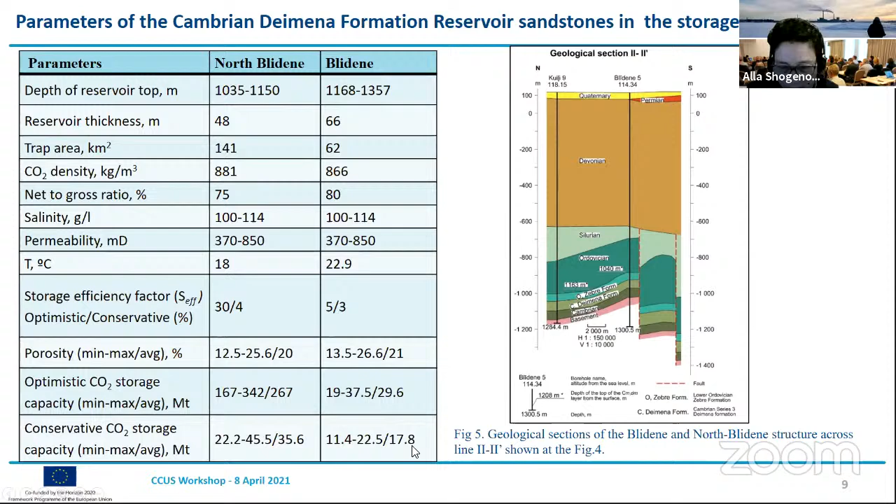We have good average porosity, 20%, and average optimistic storage capacity about 267, and conservative about 30 million tons... conservative about 36, and for the smaller part, 30 optimistic, 18 conservative.

So generally, in our scenario we are applying the CO2 use option as CO2 mineral carbonation - CO2 use for mineral carbonation.

Because we now took data for modeling from 2019, where energy production decreased so oil shale use decreased, we still have a lot of oil shale ash produced. We estimated that 3.8 million tons of oil shale ash produced at 3 Eesti Energia power plants could be used for mineral carbonation.

250 kilograms of precipitated calcium carbonate could be produced from 1 ton of oil shale ash, about 1 million tons of PCC could be produced, about 30 million tons during 30 years, and 110 kilograms of CO2 per 1 ton of oil shale ash could be avoided.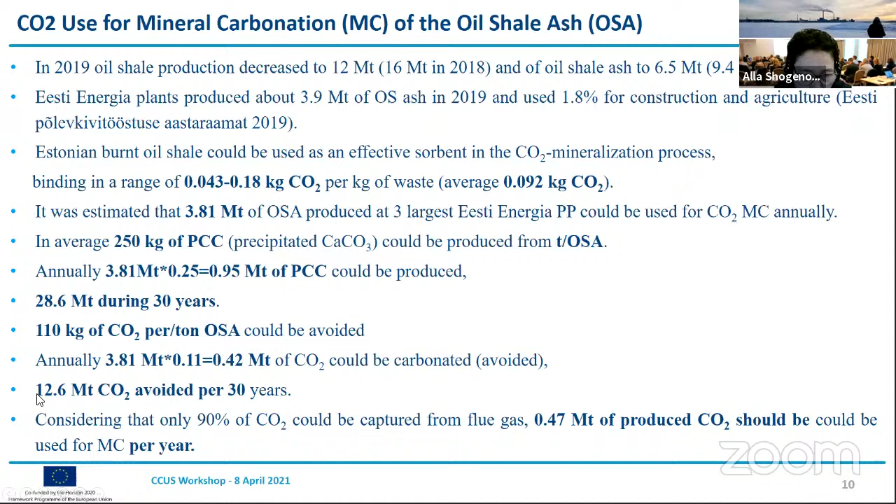We calculated that about 0.4 million tons of CO2 could be carbonated, altogether 12.6 million tons over 30 years. Generally we calculated parameters for all our plants and the percentage for the total scenario - because our plants will share the total pipelines, this percentage is used to calculate the share of costs for the common infrastructure.

So generally, the total emissions are more than 7 million tons. About 500,000 tons will go for CO2 mineral carbonation, so captured CO2 will be a little more than 6 million tons, and just around 6 million tons could be avoided during a year, 180 million during 30 years. Our scenario is planned for 30 years.

So we calculated parameters for pipelines, the same methodology as reported by Kazbulat. Generally, we have different pipelines: smaller pipelines from plants to the common pipeline, and the maximum distance of the common pipeline is designed for 710 kilometers.

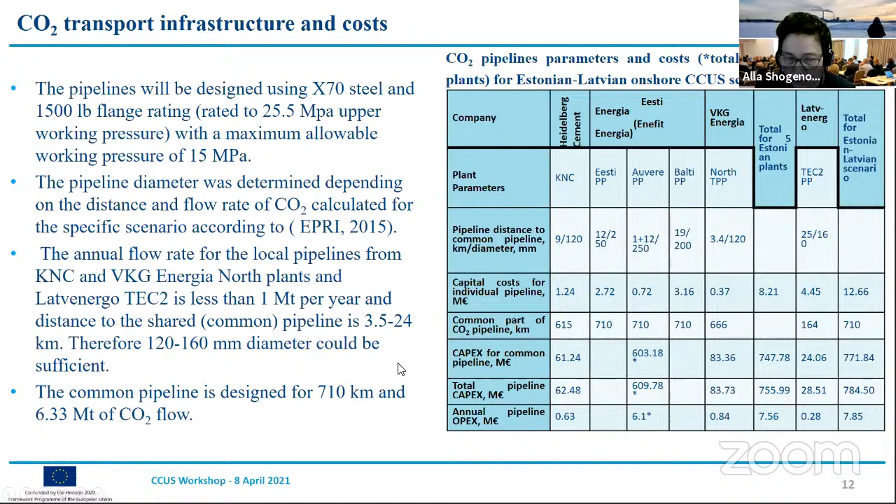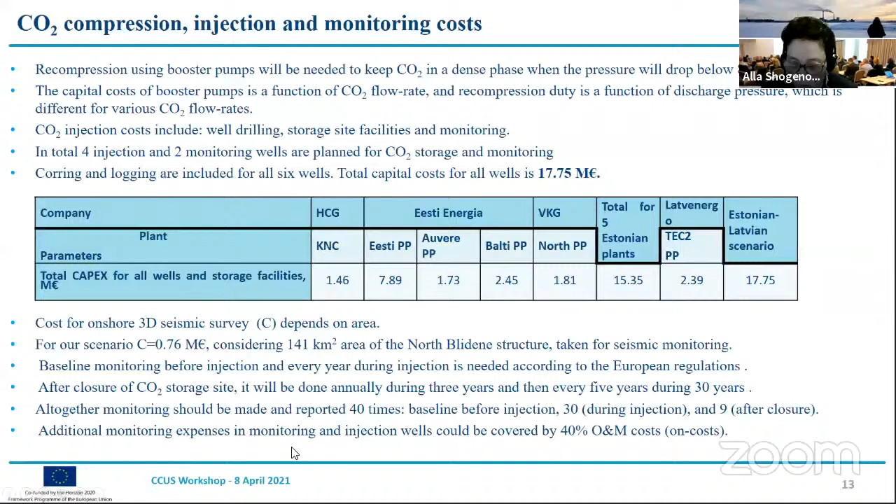And for 6.3 million tons of CO2 flow, parameters were calculated according to CO2 flow and distance. We estimated that we will need recompression because of large distances, and we are planning 4 injection and 2 monitoring wells for storage and monitoring. The capital cost for all wells, including injection and monitoring wells, is around 18 million euro. We estimated capital costs, operating costs as 40%, and annual monitoring costs and energy costs.

So altogether we got such numbers for transport and storage costs for every plant. The highest is for Eesti Energia plants, and the cheapest, of course the lowest, is for Latvenergo because it is located the closest to the storage site.

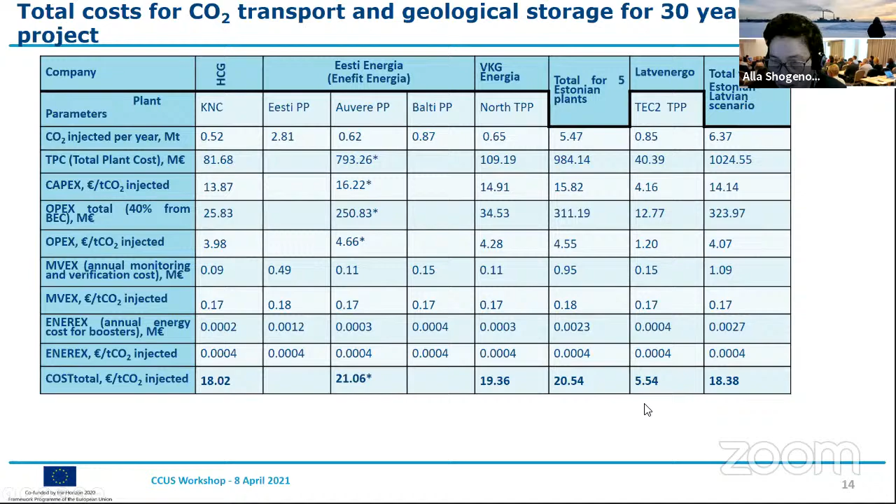For mineral carbonation, as I already told you about these technical parameters, there could be revenues avoided: 40 euro emission allowance price, which we decided to take, and 3 euro per ton oil shale ash for disposal, which is needed to pay if we use it, then we save this money. We estimated possible market price for high quality precipitated calcium carbonate as 50 euro per ton.

So we estimated the cost of 50 euro per ton CO2. The annual costs will also include transportation costs for oil shale ash from 2 plants to mineral carbonation plants, for 1 kilometer and for 21 kilometer from Balti. Transportation by trucks is 0.07 euro per kilometer per ton of oil shale ash. So we have costs, we have estimated revenues, and revenues minus cost for mineral carbonation is about 70 million euro.

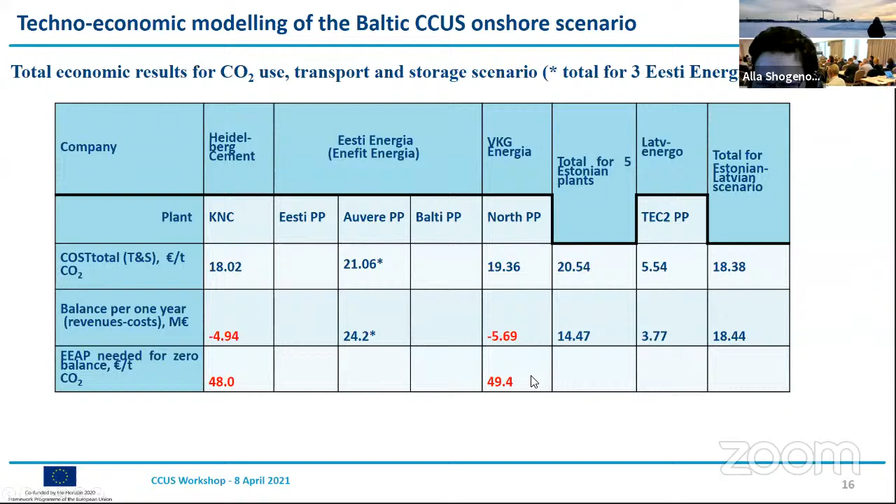So the project will be even beneficial using only benefits from emission allowance price. In order to come to zero balance, we need about 50 euro emission allowance price from EU ETS for VKG Energia and Heidelberg Cement.

And conclusions: generally, the Estonian-Latvian transboundary CCS scenario includes a cluster of 6 largest CO2 producers, including 1 cement plant from Estonia, Kunda cement plant, 5 power plants from Estonia and Latvia. 1 cement and 3 energy companies will take part in the project, and it will include CO2 use for mineral carbonation of Estonian oil shale ash and production of high quality precipitated calcium carbonate.

Annually, we can capture about 7 million tons of CO2 transported and injected, including 6 million tons avoided using transport and storage, and also 0.4 using mineral carbonation. During 30 years, more than 200 million tons could be captured and 193 avoided.

We can use 3.8 million tons of fresh oil shale ash and 0.5 million tons of CO2 for mineral carbonation. The mineral carbonation plant will be at the Eesti Energia power plant, and oil shale ash will be transported from 2 power plants to the mineral carbonation plant using trucks.

And 6.4 million tons of captured and compressed CO2 will be transported annually for onshore CO2 storage site in Latvia to North Blidene via pipelines. Small pipelines of smaller diameter, 120-250 millimeters, from plants, and 1 large common pipeline with maximum 710 kilometer length and diameter of about 700 millimeters, will be built during a 2 year construction period.

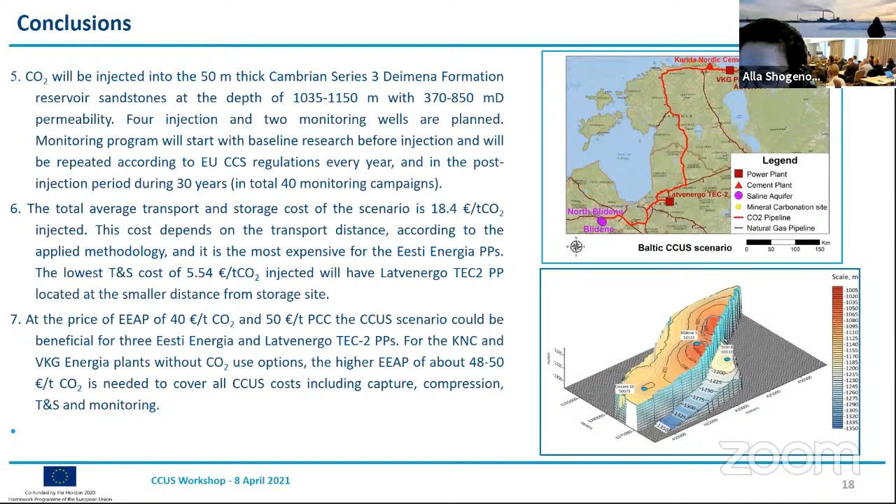We have one more question from Emmanuel Muraka, who is asking whether the routes to CO2 storage are available online in ArcGIS. In reality, we are planning to make the data available online, but it is not yet ready. Maybe we will do it by the end of the project. So generally, we have plans to make the collected data available online, but it is not yet ready for that.

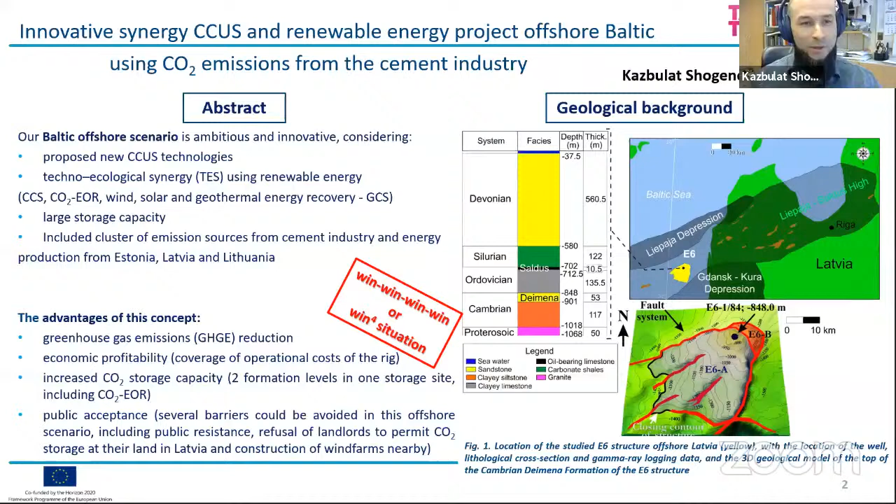So here's some geological background. You can see that the main storage formation is the Deimena Cambrian formation, located at a depth of 848 meters, with a thickness of 53 meters, with good storage reservoir parameters. And on the upper part, at a depth of 700 meters, we have a 10.5 meter thickness Saldus Ordovician formation with an oil reservoir. And this is quite a unique situation, but very close and similar to the Italian case.

But in Italy, we have it vice versa: the storage reservoir is above the storage site, and on the bottom we have the oil reservoir.

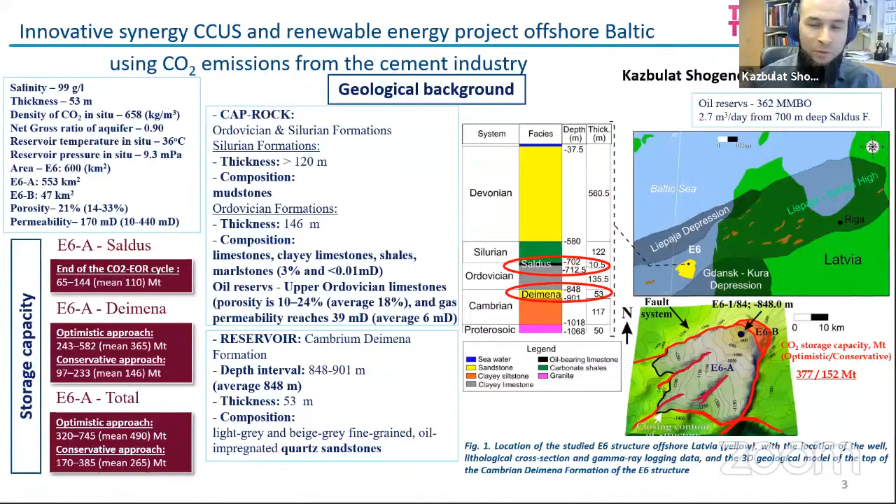CO2 emissions produced in 2019 and reported in the European trading system were used for the CCUS scenario. The methodology developed by the Cleanker project for techno-economic modeling of CCUS scenarios was applied. All geological and technical data needed for scenario modeling were collected into an ArcGIS-based system created for the Cleanker project.

For the definition of technical parameters, we used the Australian power generation technology report, as Alla already mentioned. Spatial data were collected and the map was constructed using the ArcGIS platform.

The storage capacity of the Deimena formation in the E6 was estimated with different levels of reliability using the Bachu et al. method, and theoretical storage potential of the oil-bearing Saldus formation at the end of the CO2 EOR cycle, implementing conservative and optimistic approaches, was evaluated using an equation also presented in Bachu.

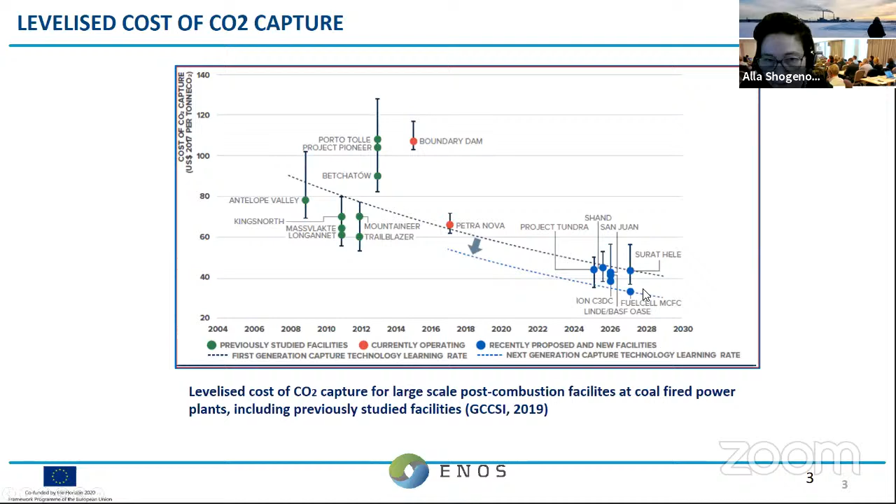And synergy of CCUS projects with renewable energy technologies are looking very prospective, with many win-win situations, which could improve public acceptance, more efficient recovery of geothermal energy, oil, gas, increase CO2 storage capacity, and more safe CO2 storage.

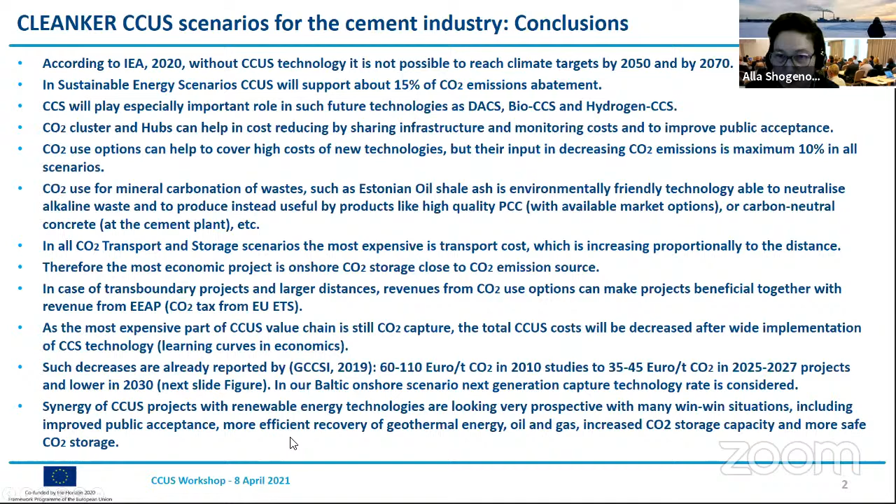Generally, this is all for conclusions, and we can move to discussion.